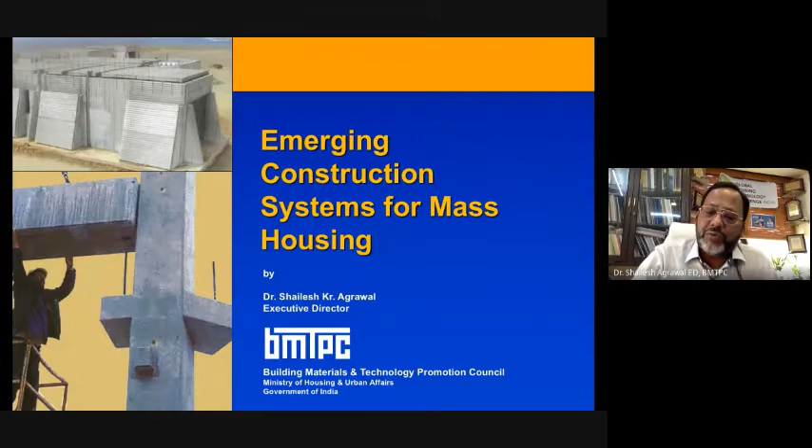So the topic is emerging construction systems for mass housing. Let me just tell you, I have included a slide about urbanization.

This contains facts and figures published by the ministry, and as you can see, we are fast urbanizing. By 2030, 40% of our population will live in urban areas, and by 2050, it will be 50%. If you see the rectangle just below that graphic, you will see that to cater to this growing population, India has to build 600 to 800 million square meters of urban space every year.

This was a statement given by our honorable minister in one of the conferences, and I picked it from there. So this 600-800 million square meter urban space means we have to build a new Chicago every year till 2030. So for the next 9 to 10 years, we have to build this much urban space.

So in order to build this much urban space, we have to be receptive, we have to be innovative, we have to be productive also. And we should always keep in mind that we have to foster sustainable growth and ensure better quality of living. So can it be done with a business-as-usual approach?

Being civil engineers and structural engineers, we are trying to bring in new construction systems which can help us build faster, keeping in mind climate change, sustainability, disaster resilience, and so many things which I will be talking about in this lecture. Also, dear friends and participants, next year we will be completing the 75th year of our independence, and we want to build a new young India.

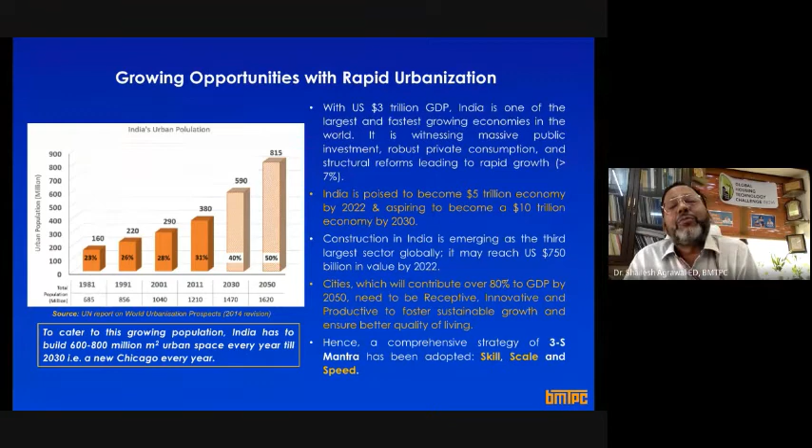So let me show you this slide, because we require this in urban areas. We work in Pradhan Mantri Awas Yojana Urban. There are two schemes being run by Government of India: one is PMAY Urban, known as PMAY Shehri, and the other is PMAY Gramin, which is rural.

Through these two schemes, the present government aims that when we celebrate the 75th year of our independence, there should be a pakka house for each household in India, particularly for the poor people of India. And because I deal with urban, we deal with urban.

In urban areas, the housing shortage when we started this PMAY mission in 2015 was 11.3 million. Just think of that scale - 1.13 crore houses need to be constructed in urban areas by 2022.

I am so proud to share that we have already sanctioned and achieved the target. Out of these 1 crore houses, 8.4 million houses have already been grounded, out of which 50 lakh houses, or 5 million houses, have already been handed over to the beneficiaries.

And out of this 1 crore houses, 1.6 million houses are being constructed with innovative technology.

Friends, this was the background - when we thought we have to build so many houses, do we have enough material? Do we have enough infrastructure to execute this kind of thing? Can we do it within the time frame given to us, without vitiating our mother nature, without vitiating our natural resources, without creating pollution and waste?

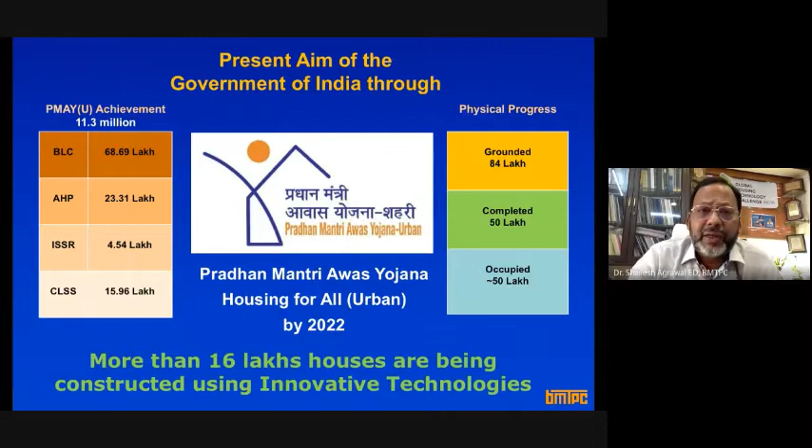Now let me tell you that these two approaches are slow track construction. They require a lot of natural resources and create a lot of pollution. The kind of material we are using is quite energy intensive. So all of this is business as usual, and if we continue to construct with these practices in vogue, we will not be able to achieve the target given to us, and we will be harming Mother Earth, encroaching upon natural resources which are already in short supply.

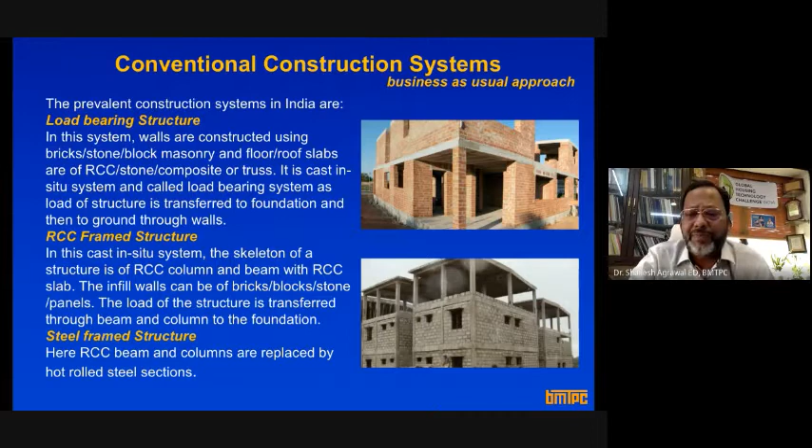And there is another thing - fine aggregate, sand. Let me tell you, earlier there used to be a proverb saying that the next world war would be fought on water. Let me tell you that the next world war would be fought on sand. If you Google and type 'sand war', you will be amazed. You will be astonished to see that sand has all of a sudden become scarce.

We never thought - we always used to extract sand from rivers or through mining, but nowadays sand is being manufactured. Sand has become a scarce material because we have been irrationally managing our natural resources. That is why, if you even see on TV, you will find advertisements for sand-making machines - just imagine that now we have to make sand. Similarly, during COVID time, we understood the importance of labor, skilled labor.

All of a sudden, all the projects came to a halt. So can't we have some industrialized systems where, whether it is pandemic or any natural hazard or any other thing, the work keeps on going without any delays. There is a shortage of skilled labor, and most of the construction is not up to the mark if we continue to adopt this business as usual approach.

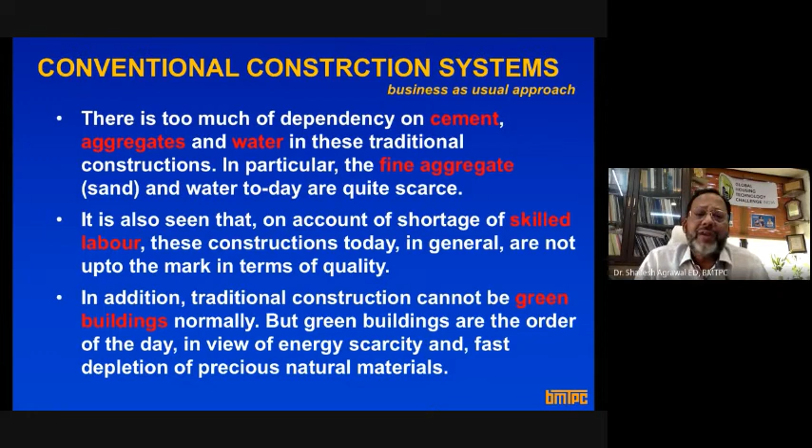So green buildings or green, sustainable practices are the order of the day, and we need to practice those in day-to-day construction and building our infrastructure.

Also, take this from me, that as a true patriot or as a true citizen of India, whatever we do, we have to do pretty fast. And when I say pretty fast, it doesn't mean that without sacrificing structural, functional, other requirements. Speed doesn't mean that you compromise with quality, affordability, sustainability, disaster resilience. But whatever we have to do, if we want to be leading the world, we need to bring in speedier construction systems, technologies, and whatever we do.

Green, because this is something of green. Ever since I've heard this word green, everybody defines these green buildings in different ways. So I have written that green aspects can be explained in four major parameters: resource efficiency, energy efficiency, eco-friendliness, and health.

Resource efficiency means, all the time we cannot take, like cement, for granted. If we talk about cement, it is based on natural resource, limestone. Steel is based on iron ore. So you need to bring in materials and systems which are resource efficient. I don't say don't use cement, don't use steel, but use them optimally.

And all of us know how work takes place at the site. There is no control on uses of water, there is no control on uses of other materials. So let's optimize the use, let's bring in natural resource efficiency. So can we use waste materials? There are so many waste.

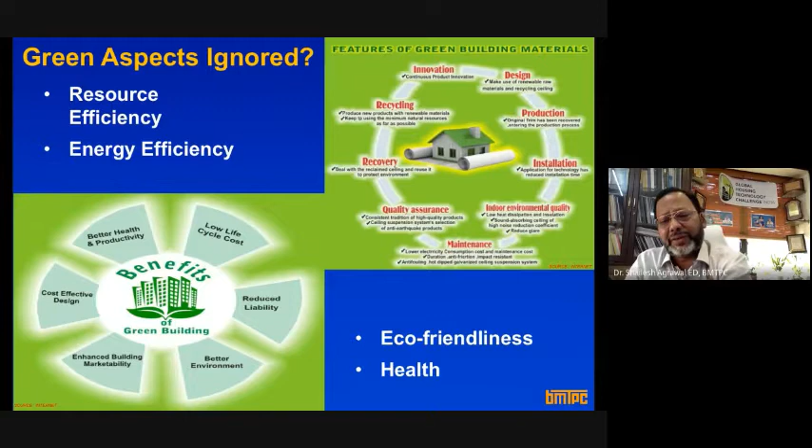At the same time, building activities contribute 50% to air pollution, 42% to greenhouse gas emission, 50% to water pollution, and 48% of solid waste is being generated through building activities.

So can we cut this? On one side, buildings consume precious energy, water, and natural resources, and on the other side, they contribute to pollution, greenhouse gas emission, water pollution, and generate solid waste.

As a signatory to the Paris Agreement, we need to cut down our carbon emissions. If we continue with business as usual, using the same building materials and technologies currently in vogue, greenhouse gas emissions will double by 2050.

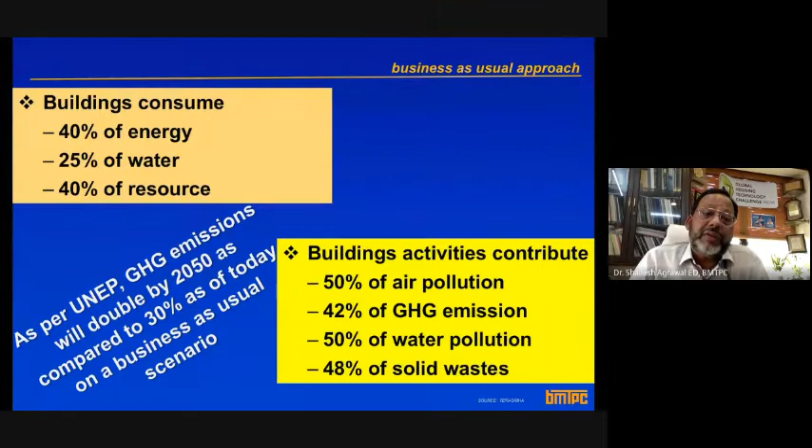So what is required? We require something new, out-of-box thinking, and that is what is being done at Government of India level. We have come out with some technologies which I'll be explaining you quickly.

We have seen structures showing no distress, and whenever there is an earthquake or cyclone, buildings start showing distress or extensive damage, and it happens because qualities are not up to the mark. So quality is also very important.

Safety. India is a country which is prone to natural hazards, whether it be cyclone, flood, earthquakes, and nowadays even thunderstorm. So safety of structure is very important.

Sustainability - this seminar is all about sustainability. So as civil engineers, as architects, or as policymakers, whenever we think of any project or build any infrastructure or building, sustainability has to be kept in mind.

Sustainability is a very wide term. If we can ensure energy efficiency, eco-friendliness, health, and disaster resilience, somehow we are able to achieve that sustainability. Life cycle cost is another new term which is being coined now.

Every time we are talking about cost - I always give the example that as Indians we talk about cost per square meter, or the cost of this. We never talk about life cycle cost. Life cycle cost is a summation of initial cost plus operating cost and disposal cost.

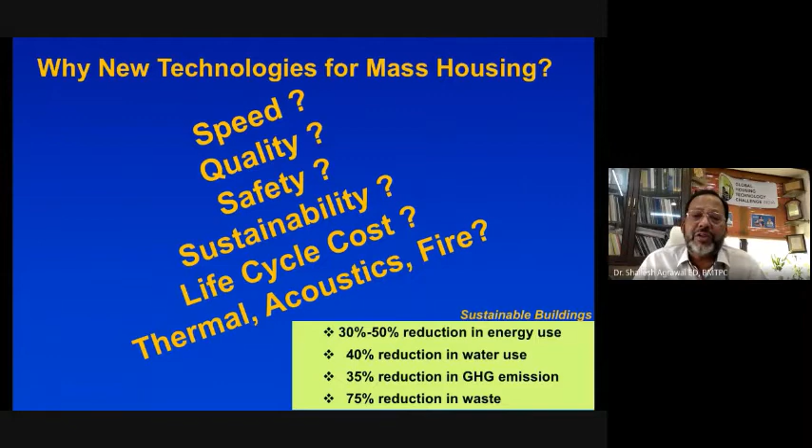Have we ever thought, whenever you go to any project site, you will find heaps of construction waste. So in times to come, there will be a rider that whatever waste you produce during construction has to be consumed in that project itself. If you go to UK, there you have to have zero waste product. So can the waste we produce be utilized in the project itself, or do we have systems, technologies, and processes where we generate no waste during construction?

But most of you will agree that the answer that comes to your mind is level 0. Level 0 is where we collect the material at the site, and then call masons, supervisors, contractors, developers, and ask them to start building the structure, building, or bridge. So collecting material at the site and doing construction, that is level 0.

And level 4 is where the entire building, pre-finished, is done in the factory. All you have to do is bring that building to your site and start using it. It's like a plug and play home.

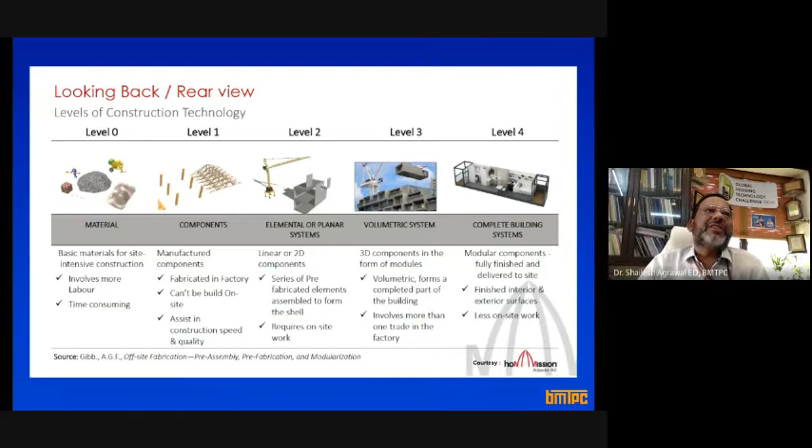I give the example of plug and play home. Plug and play is what? Plug and play is your USB drive, a plug and play device. So what is a plug and play device? It means the USB drive you put in your computer or TV and start seeing the movie or videos or your photographs or start playing a presentation.

So the same thing is being done in building construction, that is plug and play homes. You do everything in the factory, bring it to the site, connect it with plug and play, meaning connect it with water and electricity, and start using it. That is called level 4. And dear friends, we have reached level 4 even in India, which is unheard of.

Level 4 is where everything is pre-finished, meaning you put the services, the water connection, even the furniture in the factory setup, and then just start using it. Level 3 is where you just make the skeleton. Level 3 is also being used in India, and there are a number of companies who have already reached level 3.

Level 3 means you might have seen a child playing with Lego blocks. What do they do? By just putting one block over the other, they get the shape they want to create. The same thing can be done in building construction, you just make modules and put one over the other to create a multi-story tower. That is level 3, and there are a number of companies in India doing this.

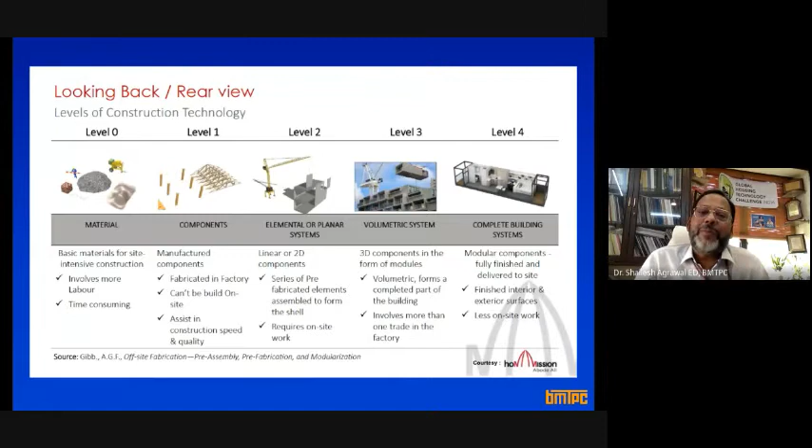As Ritesh was telling you, I normally don't preach, I practice what I preach. So already we are doing a project at level 3 where building modules, or the rooms, will be treated as building blocks. They will be fabricated in the factory, and then put one over the other to create the multi-story tower.

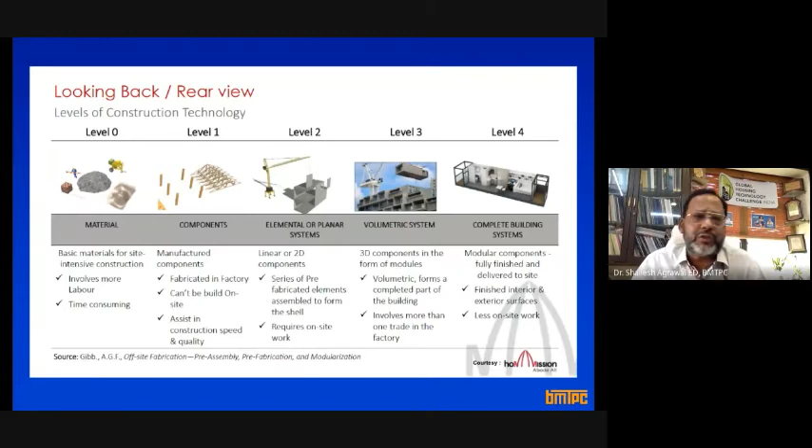So the world has reached level 4, and through the Ministry of Housing and Urban Affairs and the Building Materials and Technology Promotion Council, we are trying to take a leap jump, I call it a pole vault, from level 0 to level 4. That is our sincere attempt. And you will all agree with me, given the background I gave you, there are advantages associated with taking this jump from level 0 to level 4.

I'll go through this slide briefly now. All these technologies are customized, so another new term has come into the market, which is design for manufacture and assembly. You go to a tailor and ask him that as per your requirement, your size, your fit, you get the shirt or jacket made. The same thing can be done in building and infrastructure construction. There are companies who act like tailors.

So they will design for manufacture and assembly. You give them your requirements, your sizes and all, and they will create a plan. They will construct everything themselves and then bring it to the site.

So there are agencies now. No longer do you have contractors or developers only - you have agencies who do design for manufacture and assembly. I also want to coin an interesting word here: manufacturing of buildings. Just try to think - instead of constructing a building, we are going for manufacturing of a building.

The moment you understand the difference between constructing a building and manufacturing a building, you understand what I'm talking about. Manufacturing a building means you take the entire operations from the site to the factory. If you visit any car manufacturing facility, they use assembly line production, where each person puts one part and the end product is the complete finished car.

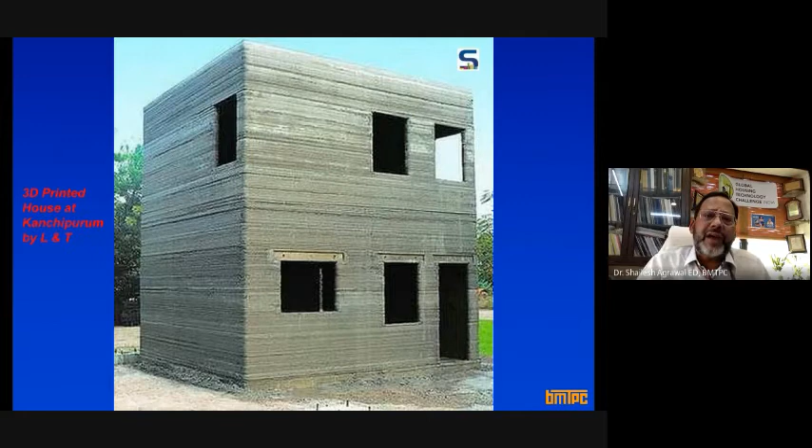This is again a slide, and as I've been repeatedly telling you, all these things have come to India, and as Government of India we are promoting them. We have already created a basket of these technologies, which I will explain. Organizers, please let me know whenever I have to finish - I'll just finish because I don't know how much time I have.

So this is a 3D printed house. This is a building done by L&T. All of you must be knowing about L&T.

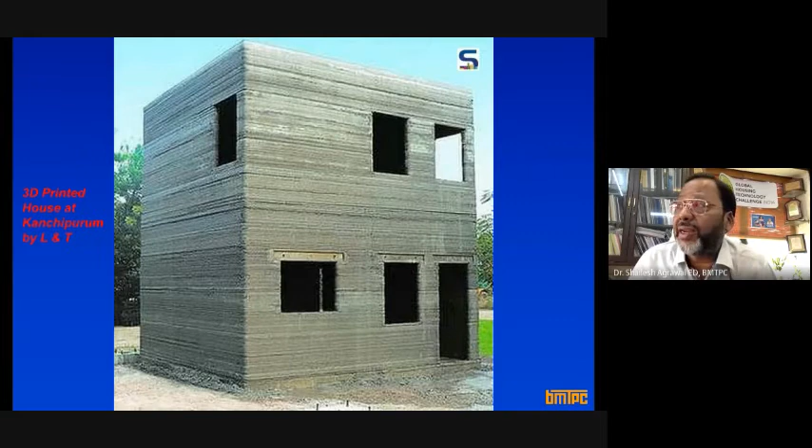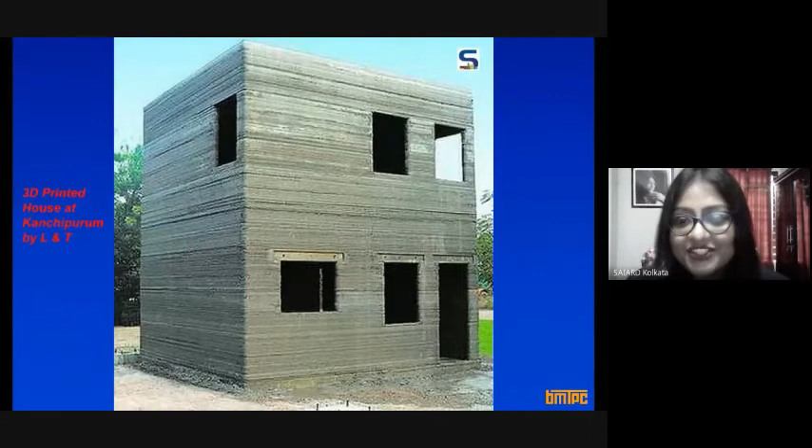So this is again a slide to show you that right here in India, this is the 3D printed house. I was fortunate enough to be part of this initiative, and it was inaugurated by the Honorable Finance Minister - I was also part of this. This is in Kanchipuram, Tamil Nadu.

This is the 3D printed building. All of you know 3D printing means you give a command to the computer, like creating a picture or a Word document - you give a command and your computer gives you the printout. In a similar fashion, you give a command here - you have a cartridge, and there you have construction ink. Construction ink is nothing but a special kind of cement, and through robotics, with just a click of a command, you can print this kind of building.

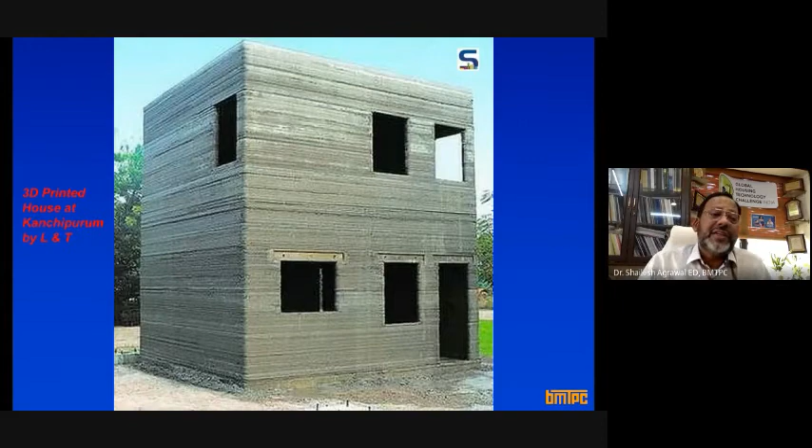So this is the first 3D printed building in India. With this background, let me tell you we have shortlisted around 54 new construction systems, which are broadly classified into 6 categories. I will not go into detail because I am already encroaching on your time.

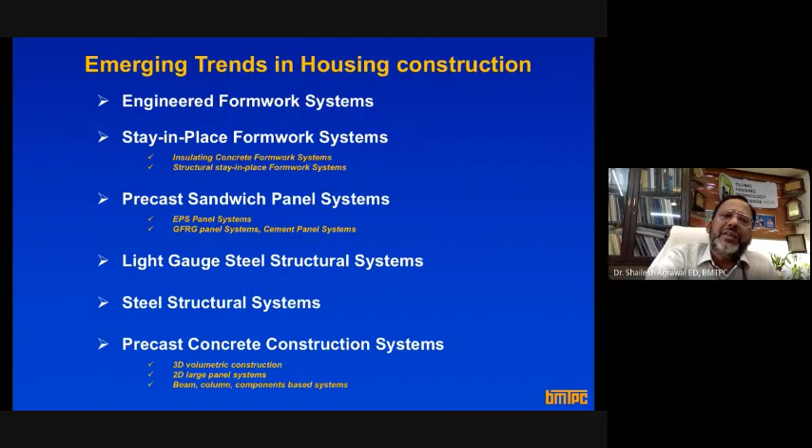So what is being done is you get the girders and columns made in the factory, and one fine day you have the columns erected, and over that column you put the girder, and then you start doing the metro operation. So similar kind of things are being practiced in the construction sector. Let me not go into all these details.

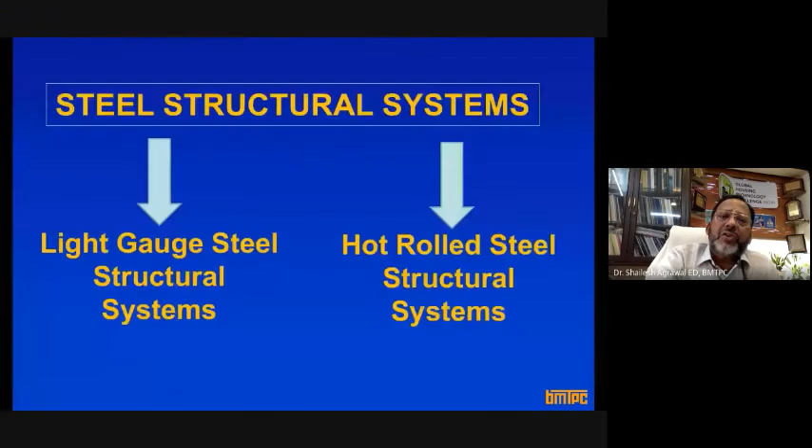I will just give you one slide, because since Hiteshji was talking about the global housing challenge, looking at all these needs, even our honorable Prime Minister was quite fascinated by these new construction systems and thought we should bring these technologies to our country.

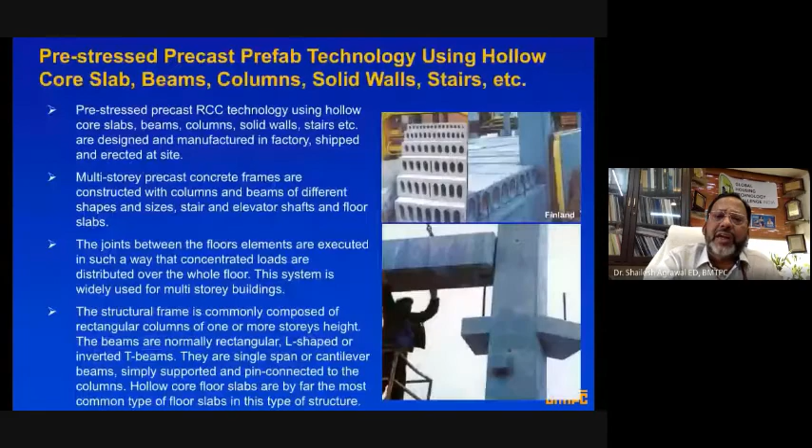And what we did was conceptualize the Global Housing Technology Challenge, and we floated a challenge to global technology providers and agencies, asking whether we can have construction systems that can help build the maximum number of houses in minimum time and minimum cost. Let me repeat, we threw a challenge at the global level to the world, asking whether we have construction systems, processes and technologies which can help build maximum number of houses in minimum time and minimum cost.

And that challenge was a huge success. It was inaugurated by the Honorable Prime Minister in March 2019, and through that challenge we shortlisted 54 new construction systems. The details of those systems are available on this website. Please make a note of this, it's a very informative website. You will get all details about the technology, systems, and our initiatives on this website.

So GHTC stands for Global Housing Technology Challenge, GHTC-India.gov.in. You go to this website and get the information. So these are the 54 new technologies, which are again divided into 6 broad categories. I'm not going into the details of this technology.

So all these 54 technologies are available now, and we want to make these the technologies of the future. As I was telling you, to walk the talk, we have already started the lighthouse projects where we're constructing more than 1,000 houses at 6 locations, which I will show you.

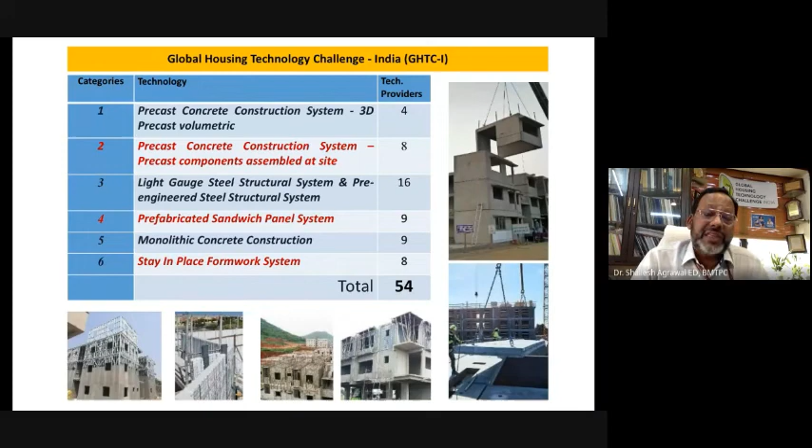Yeah, this is the slide. Now using these 54 technologies, we are constructing 6 lighthouse projects. These lighthouse projects are like incubation centers where all of you can go see the implementation of these new technologies, learn them, and adapt them in your future. The idea here is to adopt these technologies and make them technologies for future construction in India.

So these are the 6 lighthouse projects, and the foundation stone laying ceremony for all these projects was done by the Honorable Prime Minister in virtual mode on 1st January 2021. All these projects are running pretty fast, and the construction time given for completion is 12 months, and whoever completes it fastest gets prize money.

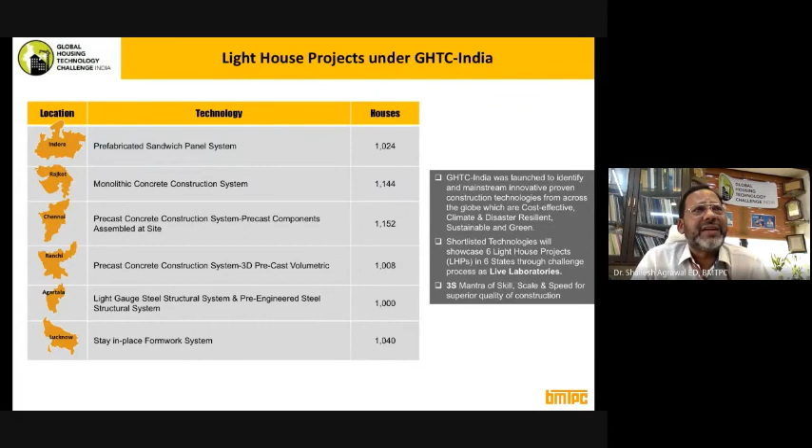There is an incentivization, so these projects are to be completed in 12 months. Through this platform, while inaugurating these projects, the Honorable Prime Minister urged that all stakeholders, including students, faculty members, and policy makers, should go visit these projects and understand these technologies and start using them. So this is that slide to show you that the Prime Minister did that.

And what we are doing is also calling these lighthouse projects live laboratories, and we have also started a scheme called Techograhi. I urge all of you, if you have not registered, to enroll yourself as Techograhi. Techograhi is a word coined on the lines of Satyagrahi.

Satyagrahi was the word given for freedom fighters by the Father of the Nation, Mahatma Gandhi ji. After that, when we started Swachh Bharat Mission, we coined the word Swachhagrahi, and now we have coined the word Techograhi. Techograhi is a word for all stakeholders who would be the change agents of innovative and sustainable construction technologies. You can all get enrolled free of cost, and once you enroll as a Techograhi, you will be connected with the Ministry and us, and you will get to know the progress of all these projects and the latest trends on all these things.

So with this, I will finish, and this is my last slide. I'm sorry for encroaching on the time. So let's be part of India's growth story by reforming, performing, and transforming.